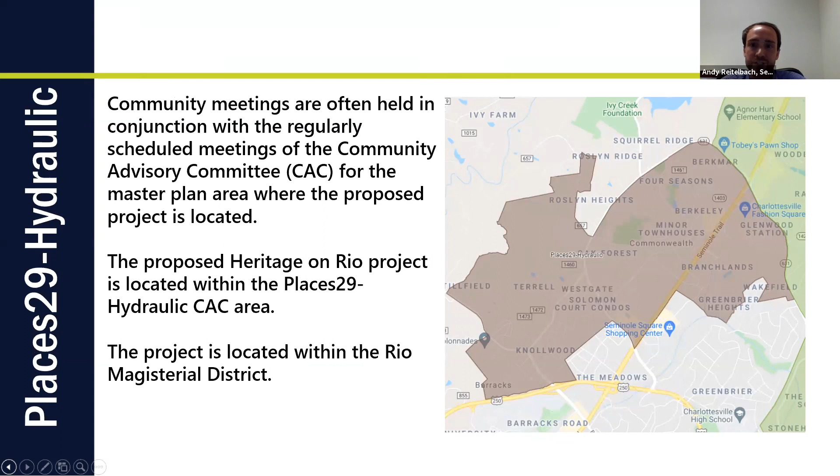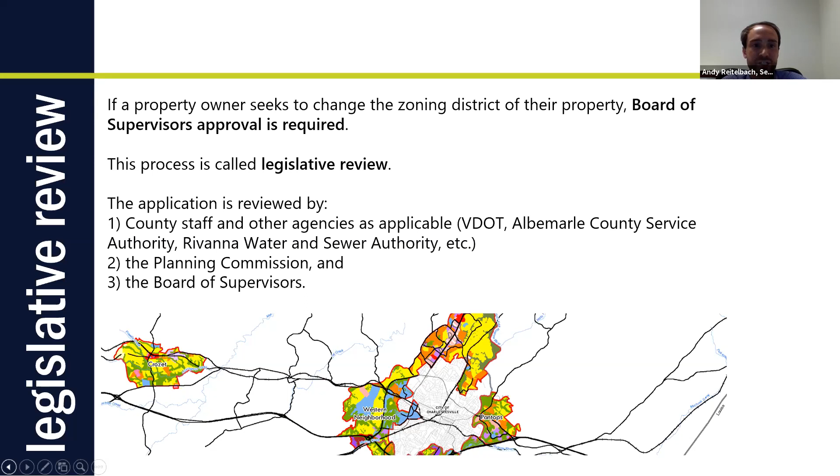So what is legislative review? If the property owner seeks to change the zoning district of their property, as with this application, Board of Supervisors approval is required. Leading up to the Board of Supervisors meeting, the application is first reviewed by county staff and other agencies such as VDOT, the Service Authority, the Rivanna Water and Sewer Authority. Then it goes to the Planning Commission, and they hold a public hearing and make a recommendation on the application to the Board of Supervisors. Then the Board of Supervisors will hold a meeting, a public hearing, and make the final decision to either approve or deny the request.

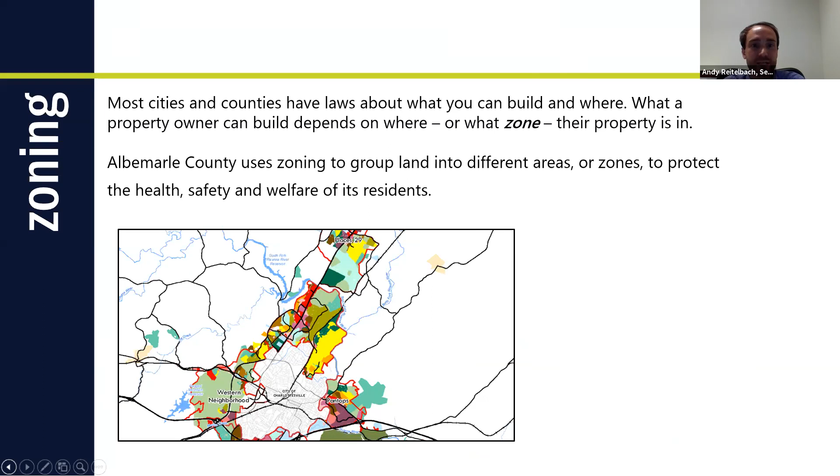So first, what are zoning and comprehensive plan? Zoning first: most cities and counties have laws about what you can build and where, and that depends on what the zone of the property is. The county uses zoning to group land into different areas to protect the health, safety, and welfare of the residents of the county. There are 2 main ways the zoning ordinance groups development together: either use of buildings such as residential, commercial, institutional, industrial, or the size and shape of buildings, including building height, square footage, or how far the building is set back from the street and neighboring property lines.

The zoning ordinance dictates what can be done by right today. And if the proposed use of a property is not permitted currently by the zoning ordinance, then they will go through a rezoning process, like with this application, to be able to change the zoning ordinance to allow the use that is proposed.

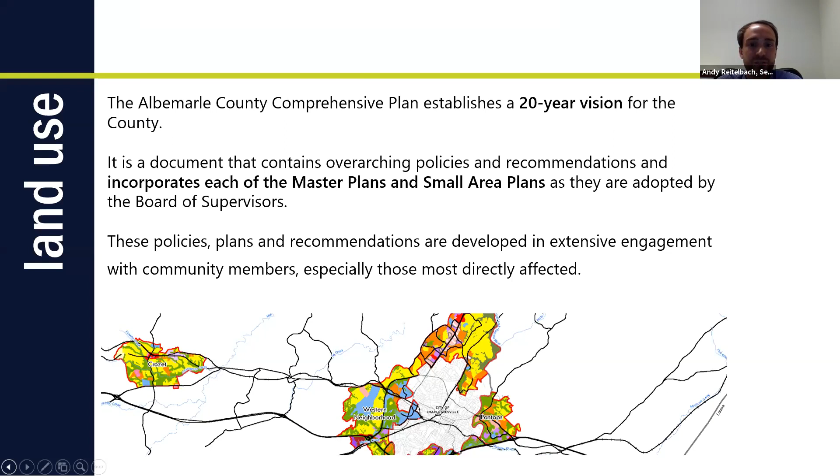And so for that, we also look at the comprehensive plan. The Albemarle County Comprehensive Plan establishes a 20-year vision for the county, and it's a document that contains overarching policies and recommendations that also incorporate each of the master plans adopted by the Board of Supervisors. All of these policies, plans, and recommendations have been developed through extensive engagement with community members over the years. Each development area has a master plan containing future land use recommendations for every property. The master plan for the area where Heritage on Rio is proposed to be is the Places29 master plan.

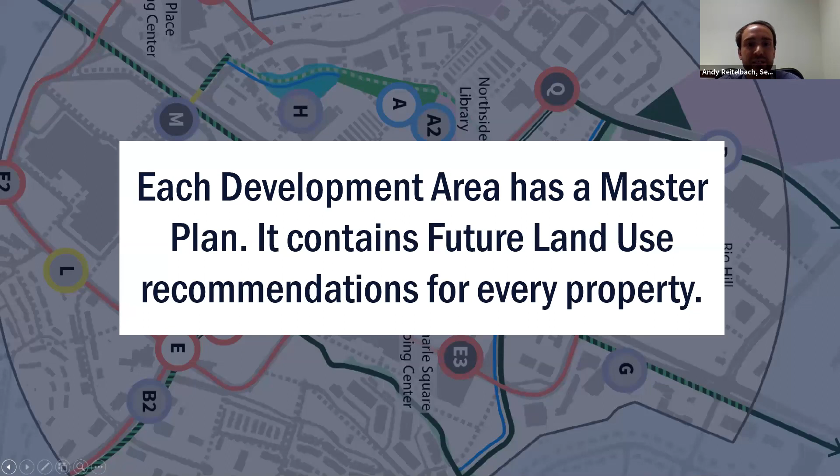Sometimes the current zoning and the future land use designation do not always line up, and that is one reason why a property owner may choose to request a rezoning of their property. More specifically, a rezoning is a request to change the property zoning. The application is reviewed for consistency with the area's future land use designation found in the comprehensive plan, in this case specifically the Places29 plan. It's also reviewed for consistency with all state and local standards and regulations.

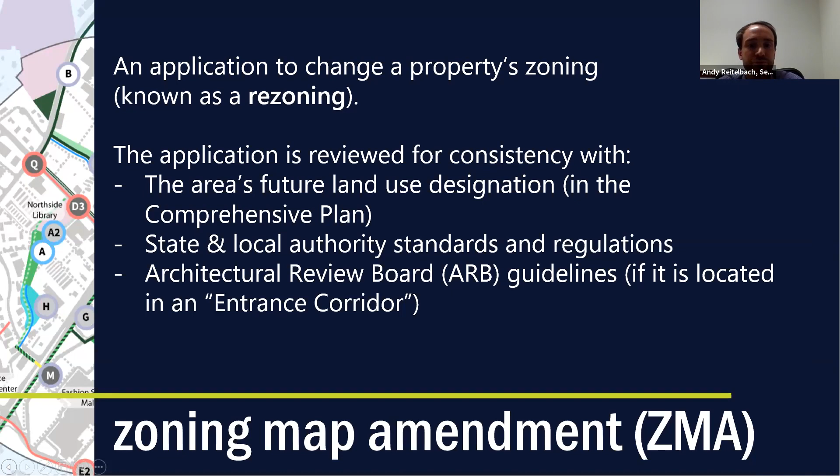And if a property is in an entrance corridor, and this property is, it is also reviewed by the Architectural Review Board under their guidelines.

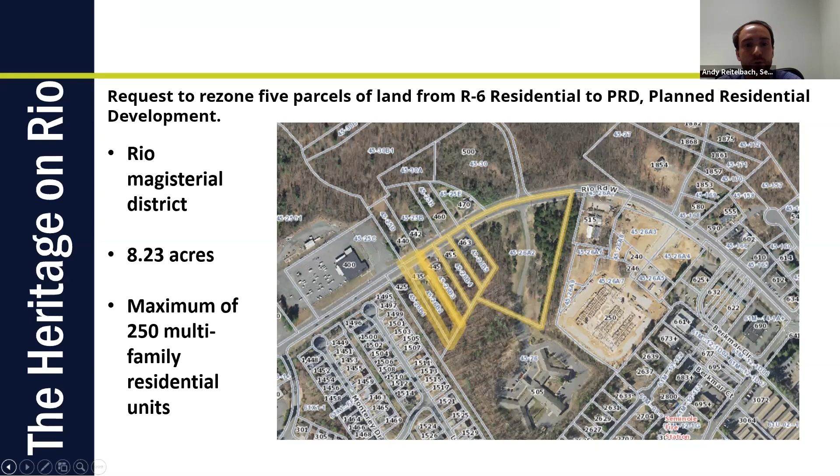So the existing zoning is R6 residential, which allows up to 6 dwelling units per acre. The applicant is requesting to have it rezoned to planned residential development, which allows residential up to a maximum of 35 units per acre, along with limited commercial uses.

And then this property is also located within an entrance corridor, which is Rio Road West. It's located within the overlay district of the airport impact area. And then there are managed steep slopes on the property, which means there are slopes greater than 25% on the property.

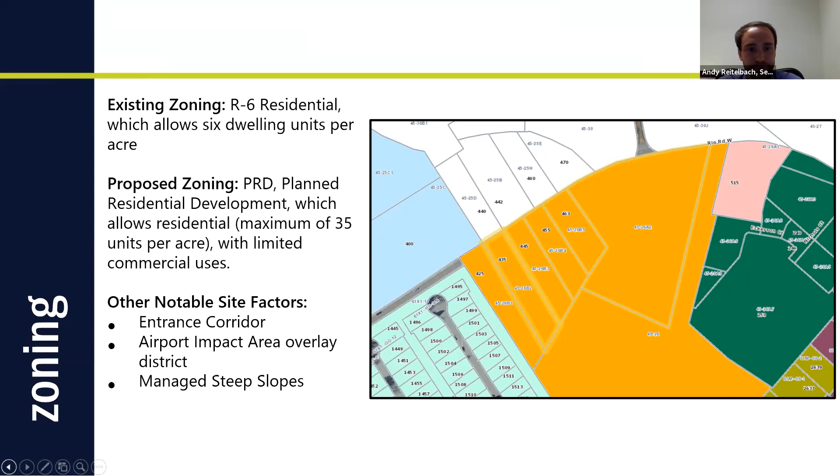So then looking at the future land use designated in the Places29 master plan, there are actually 2 land use designations on these 5 parcels: urban density residential and neighborhood service center. In the map on the right, the orange is the urban density residential, and the pink and white striped portion, in the very northeast corner of this property, is the neighborhood service center.

Urban density residential recommends residential uses at a density between 6 and 34 units per acre, with limited supporting uses such as religious institutions, schools, and small scale commercial office and service uses. And then the neighborhood service center recommends commercial, retail, and employment uses with supporting residential between 3 and 20 units per acre.

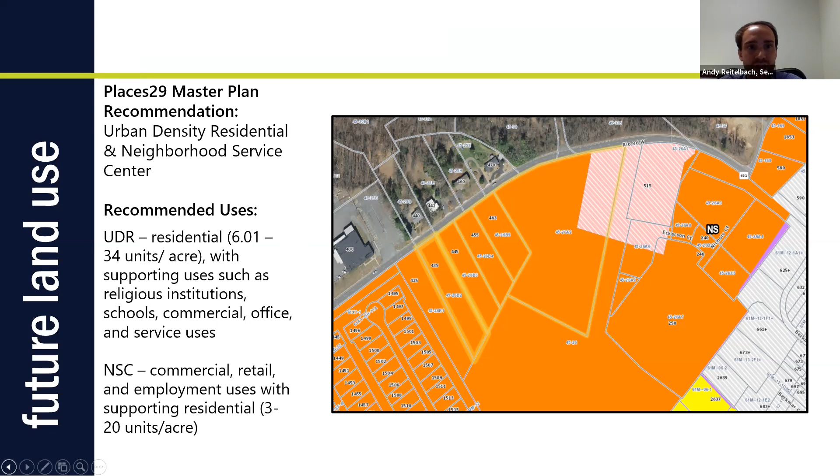And this evening is the community meeting. And then, as I mentioned, we will also eventually have public hearings with both the Planning Commission and the Board of Supervisors. However, those meetings have not been scheduled at this time.

So now I will turn it over to the representatives for the applicant, and they will provide more details on their proposal. And so that is Valerie Long and Megan Nedostup of Williams Mullen. Thank you.

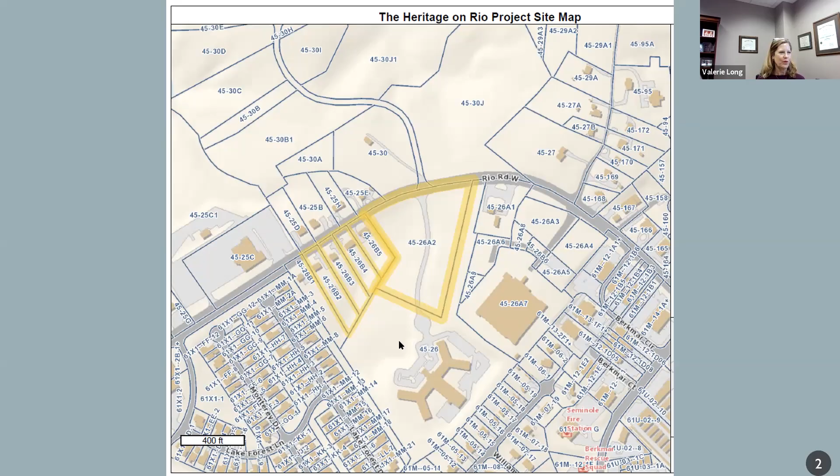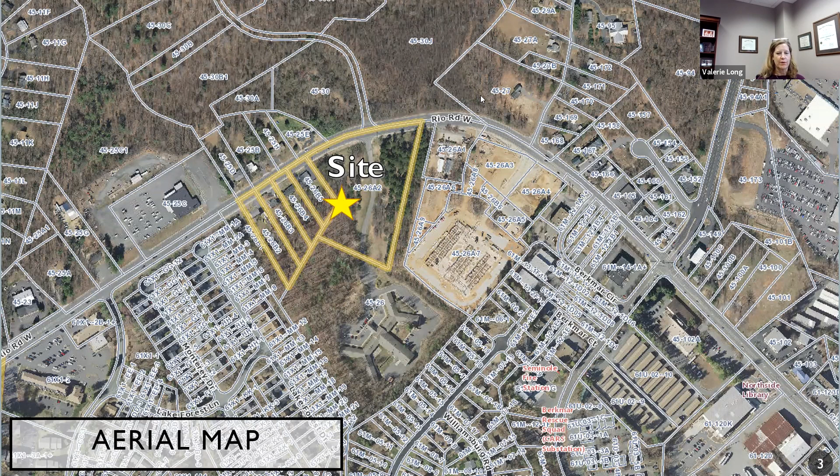Of interest, Rio Road forms the boundary of the designated development area in this location, so parcels on the opposite side of Rio Road are not located in the development area.

As Mr. Reitelbach indicated, the property is adjacent to an entrance corridor, so the Architectural Review Board will have jurisdiction over the site plan.

And I think I mentioned that this is the Oakley property, that's now zoned neighborhood model development, and the Garden Spot is a commercial zoning.

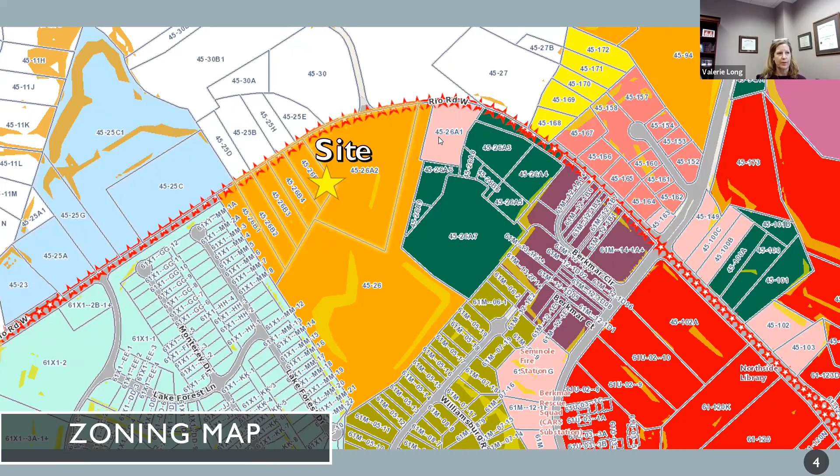And as Andy mentioned, there is a neighborhood services designation here per the Places29 master plan. And then the recently approved Rio area intersection - as many of you probably know, because I'm sure you covered it extensively as part of your CAC meetings, the Rio 29 small area plan was recently approved.

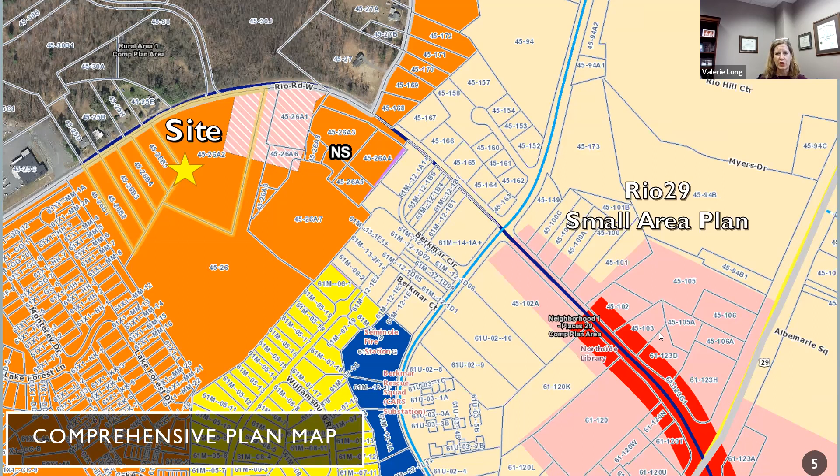This is not within the boundaries of that small area plan, but it is very close. You can see from the parcels in the sort of pale yellow and then the pink, those are within the small area plan. So it's on the border, or on the edge, not in it, but very close to that area. So we think that this project will really support and further the goals of the small area plan.

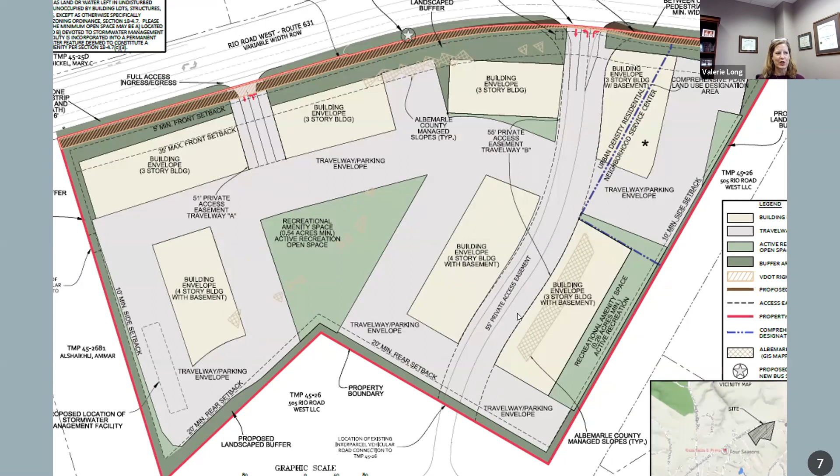So this would be the binding plan that shows the main entrance - the existing entrance would serve as one of two entrances to the project from Rio here, and then this is a new entrance that would be created. All of the rectangular areas in pale yellowish are building envelopes where buildings would be located. We're proposing a total of 7 buildings and a maximum of 250 residential units.

So the one change I want to point out to you, and you'll see this on our illustrative plan, is since we submitted the application last month, we are proposing to rotate this building 90 degrees. So the long side of this building will now essentially mirror this location. I'll show that to you, but didn't want you all to be surprised by that.

We also have recreational amenity areas and open space designated, as well as some landscape buffers around the perimeter of the property, both along the sides and then in the front.

And then right now, as the folks who live nearby probably know, there is a sidewalk, but it's a fairly narrow standard width sidewalk, and there is not a grass planting strip or anything. The sidewalk is right on the edge of the curb.

We're proposing as part of the project to replace that existing sidewalk with a 10-foot wide asphalt multi-use path that would better accommodate pedestrians and those with bicycles or strollers. It would also include a grass median strip between the road, the curb, and the new path that will make things more comfortable and provide a little bit of a separation zone for pedestrians and bicyclists walking in that area adjacent to Rio.

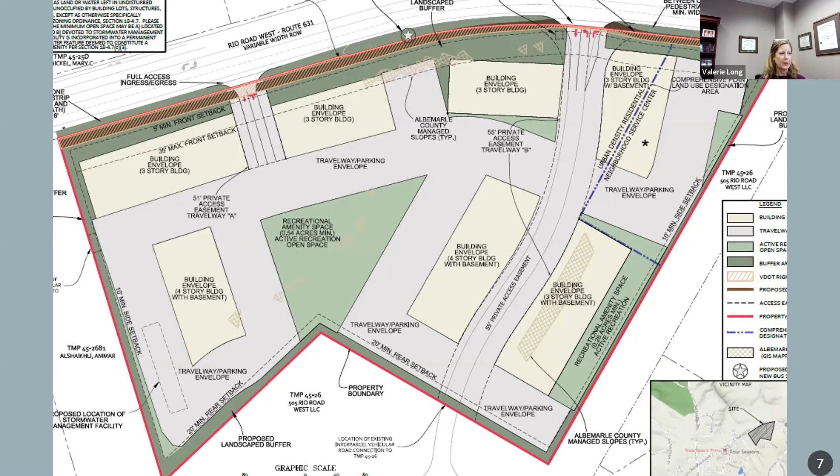You can see how along this frontage the existing sidewalk would be replaced with the path, and how that area would be incorporated into the project.

This is an illustrative plan. We have not yet submitted this. We will be submitting it with our next round after we receive Mr. Reidelbach's comments. We know we're going to need to update our plans to respond to those comments, but we wanted to provide the community committee with an illustrative plan to give a little better information about what this project might look like, knowing that the application plan can sometimes be a little obtuse.

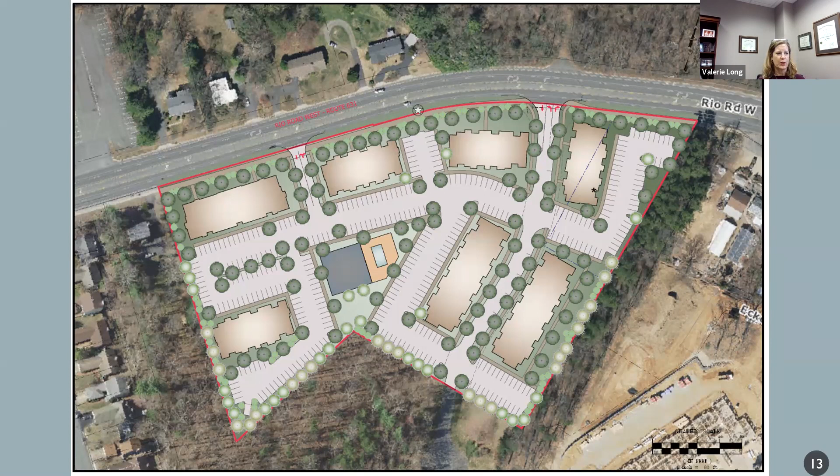This is the central amenity area. They will have a clubhouse, a pool, and a fitness center — some of the typical amenities you see with an apartment community like this. There's also an area back here reserved for recreational amenities, maybe a dog park, and there'll probably be a tot lot somewhere on site. All of those details haven't been fully fleshed out yet; we'll certainly have to do that by the site plan stage, but we wanted to show that we can accommodate those areas.

This is a better close-up with labels on some of those amenity areas I just mentioned — amenity area here and here. This, for reference, is the existing driveway for the rehab center. New bike path here — it's a little hard to see because the red property line obscures it a bit, but this is the location of the new path all along. There are some buffer areas along the front and sides, and then the proposed location for the new bus stop.

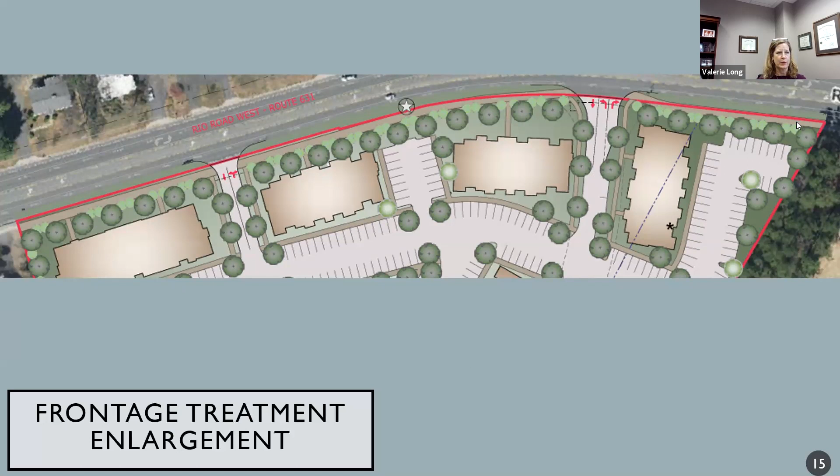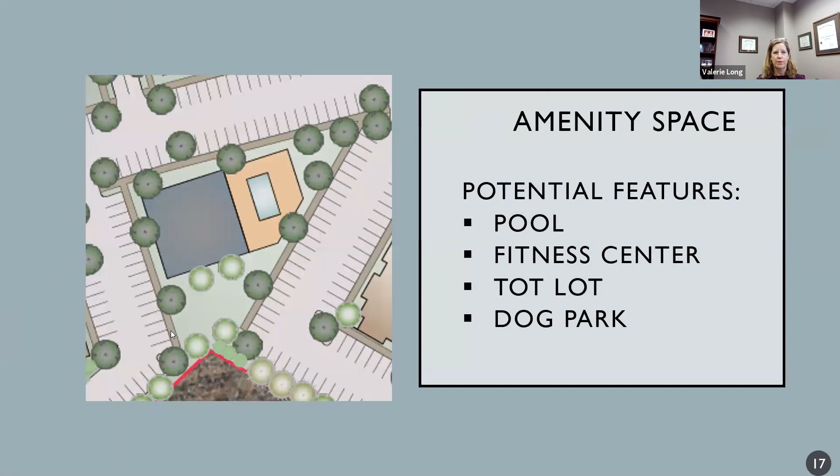This is just a close-up showing a little better the new asphalt path along the front, since it was a little hard to see. Similarly with the landscape buffer adjacent to the private property, and then some details about the future amenities that are proposed.

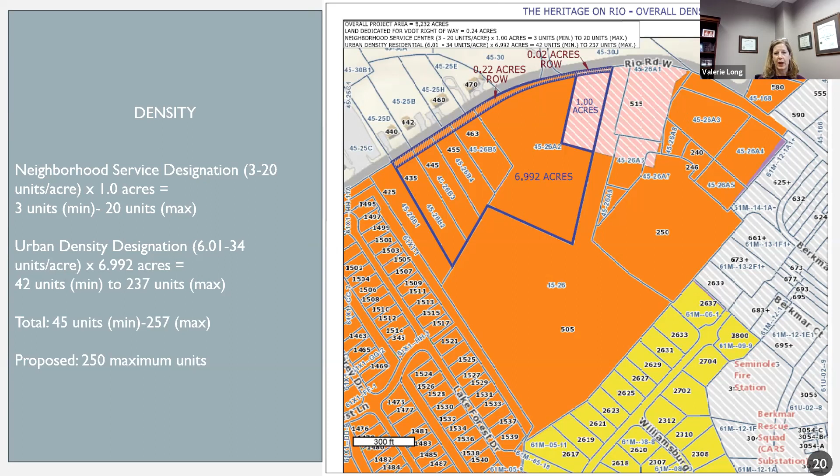And overall, it's 31.2, I believe, total. So it's within the recommendations.

One last thing I did not yet touch on, let me back up if I may, is the affordable housing component of the project. As required by or recommended by the county's affordable housing plan that's in effect, the project is proposing that 15% of the units, of the rezoned units, will be affordable to those making up to 80% of the area median income.

Since the property already has the zoning of R6, that allows by right 6 dwelling units per acre. And at this acreage, it's just about 50 units that could be built by right.

So as part of the affordable housing, for all of the units above that 50 by right lot yield - so 200 units - 15% of the 200 units would be affordable per the county standards, and that comes to just about 30 units, if my math is correct. So that is a proffered note on the application plan.

And with that, I'm going to ask Megan or Rob or Will Gordon or Scott Collins if I've forgotten anything. I'm going to stop sharing my screen so everybody can see each other a little bit better, but we can obviously go back to any of those slides at any point if anyone wants us to.

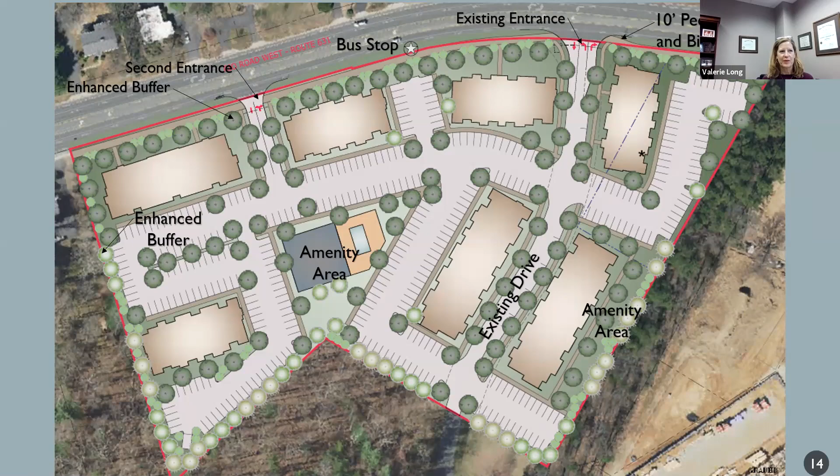We have, Jane? So how does this impact the schools and the population of the schools in the area? Sure. Well, as you all probably know, students from this community would attend Agnor-Hurt Elementary and I believe Sutherland Middle and Albemarle High School. As I think most people know, Albemarle High School is at capacity right now. Agnor-Hurt does have sufficient capacity ever since the expansion at Woodbrook was put in place.

Based on our review of the most recent recommendations of the school division's long-range planning committee, the committee has recommended that the county fund a new high school called Center 2, located near Albemarle High School, similar to the Center 1 facility at the old Comdial building. That would help relieve capacity pressures at Albemarle High School right now.

There are certainly other recommendations the committee has put forward, addressed to both the school division and the Board of Supervisors, including building a new elementary school in the northern feeder pattern. So there will be some students at this project, if approved, families that live here with school-age children.

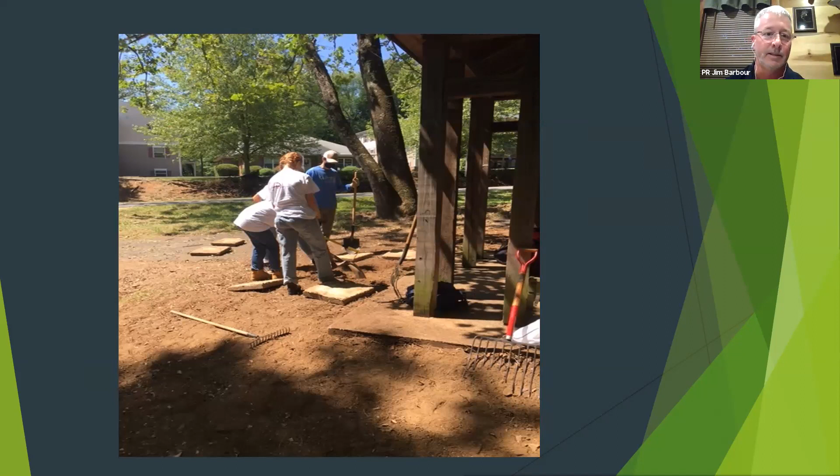Ms. McKeel, there's your pavers. When they had removed them out, we actually found several more pavers we didn't know were there at the time. So that's how overgrown it was. Okay, Michaela.

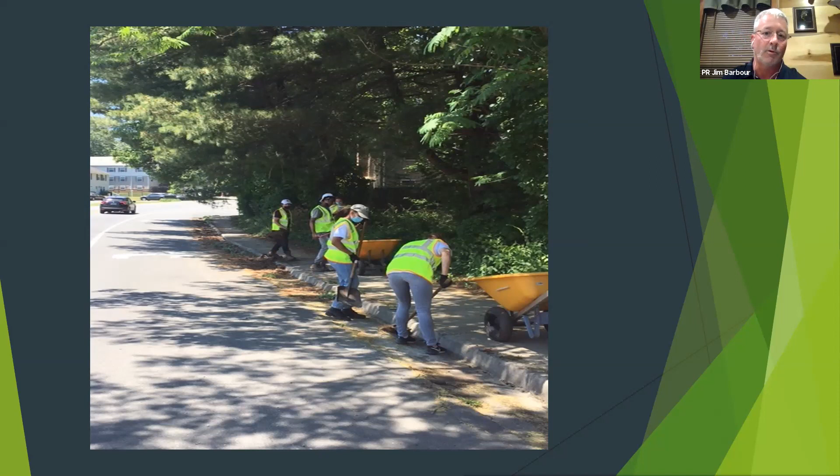Another project throughout the day—earlier in the year during the survey, benches throughout the park were some of the recommendations. So park staff, we incorporated 5 benches throughout the 1.5 miles of trail systems. And before, they weren't mulched, so we had a bunch of this ballast stone aggregate in possession. We thought a better permanent mulching around those benches was that ballast stone.

They handled it, it's all wheelbarrow work.

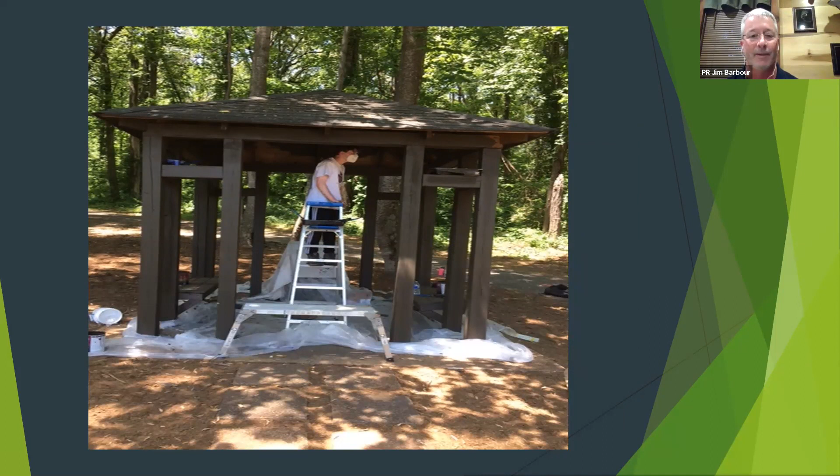So here we are on day 2. They came back once the non-native species were removed. This is restaining of the current memorial. Obviously took care in protecting the memorial and the floor surfacing there. This guy, unfortunately—I hope he recruited some more friends, but he was the only man in there at the time. So, next slide.

So middle of May is not the time to plant plants of any species, including native plants. So we decided that we would hold off until the fall of this year when it's ideal conditions to plant. I reached out to Rep Glatley, who was our stormwater or water specialist for facilities environmental services. He also was co-author of the Piedmont Native Species book. So I reached out to him with species recommendations back in May and came up with a plan in September that we would do this planting. This took place on September 30th, so the next set of slides through here will be that project.

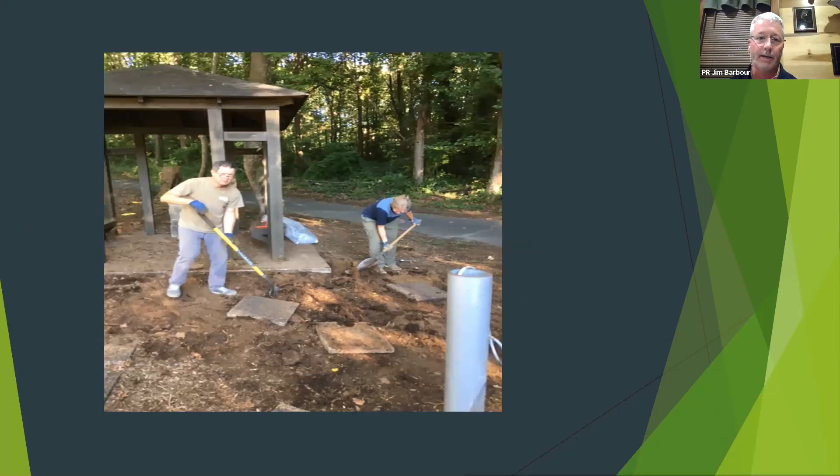So once again, this is where we had to redig some of the new growth that had come back since May. Got a lot of the Nandina and Liriope out of there, moved the stepping stones. Staff, this is Albemarle County Parks and Rec staff.

Rep is right there, and here's the hardest working crew of the day right here. So we drank coffee and ate donuts and watched them work.

Don't—well, really appreciate your support. Kim worked hard. Cynthia and I stood around and drank coffee and watched. We can't thank you enough for that, but Kim, thank you so much. There's some photos in here, Kim. So this was that day, and thank you for—I know staff really appreciated the coffee and the bagels. So this is kind of the layout.

I think he had found a couple species once we realized how the sun was shining that day that he wanted to change out. But over 200 native plants went in that day before lunch, so from rejuvenation of the soil to planting to mulching to first round of water happened within several hours.